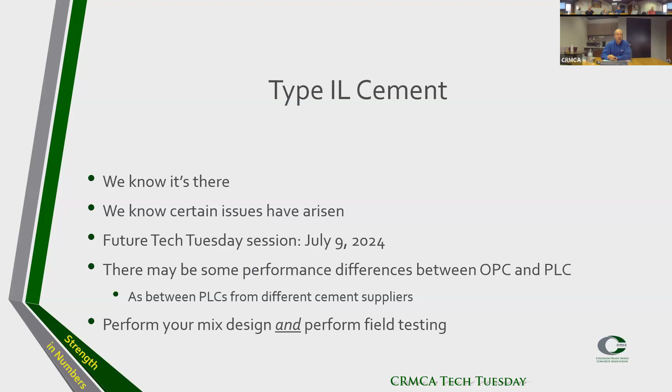So again, with IL, there might be a little bit more sensitivity, but the topic today is really about general hot weather concreting.

Impacts of hot weather on concrete properties. Generally, optimum concrete temperature is around 50-60 F. We all know that more realistic temperatures are between 50 and 90 F, sometimes even higher. Hot concrete has adverse effects: heat of hydration accelerates faster, evaporation of water and faster set. So everything goes a little bit quicker if we have hot concrete or if we have hot weather out there.

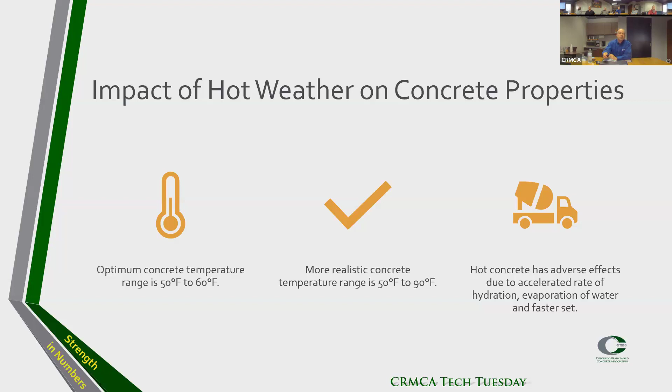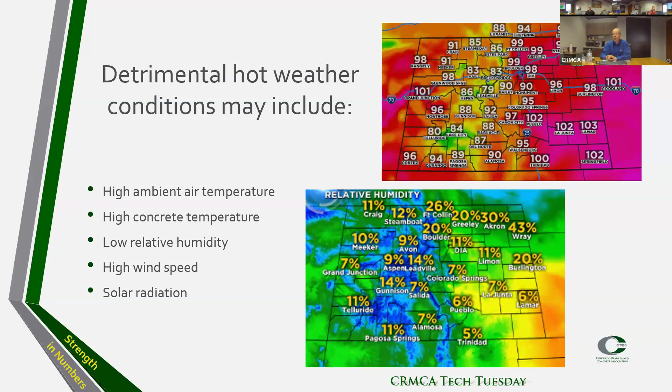Detrimental hot weather conditions may include high air temperature—we all know it can easily hit 100 degrees in the months of July and August—high concrete temperature, low relative humidity. We've seen, or we see quite often, humidity down in the single digits, below 20%, below 10%. High wind speed and solar radiation. So if we talk about hot weather conditions, these are all the conditions that we include for this topic.

Problems that may be created by hot weather or hot concrete include increased water demand and accelerated slump loss. You batch at the plant, drive out 45 to 60 minutes, and you might have quite some slump loss, especially at hot temperatures. It's more difficult to control the air in hot concrete, and set times are much faster.

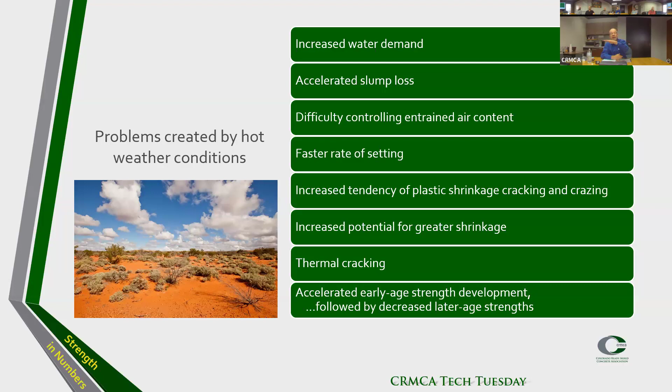Plastic shrinkage, cracking, and crazing are increased generally if you have hot weather conditions. You have more potential for shrinkage, and thermal cracking might be an issue. What we see quite often is that you have pretty good early strength in the concrete, but later the 28 day strength doesn't make it that high. So it accelerates in the beginning, but tapers off really fast if you have hot weather, hot concrete.

Let's talk about workability and slump loss. Slump loss is often compensated with water addition, resulting in lower strength. Here's an example, let's go through this chart. What we see up there is if we take a temperature of around 50 Fahrenheit, we go down the graph and we see that we need, in this example, around 270 pounds of water per yard of concrete.

If we go from 50 to 100 degrees, given this is an extreme example, we now need an additional 33 pounds of water. That's about 4 gallons per yard additional to maintain the same slump. So that means per 10 to 15 degree increase, we need about 1 to 2 gallons more of water. If we actually add water, we're going to reduce the strength quite a bit.

The general rule of thumb is for every gallon of water added per yard, you're going to lose 200 to 300 psi. In this extreme example, we would lose about 20%, or roughly 1,000 psi, at 28 days for that concrete. So the recommendation, easier said than done especially at the construction site, is to add a hydration stabilizer or water reducer, don't add water. The water will always reduce your strength.

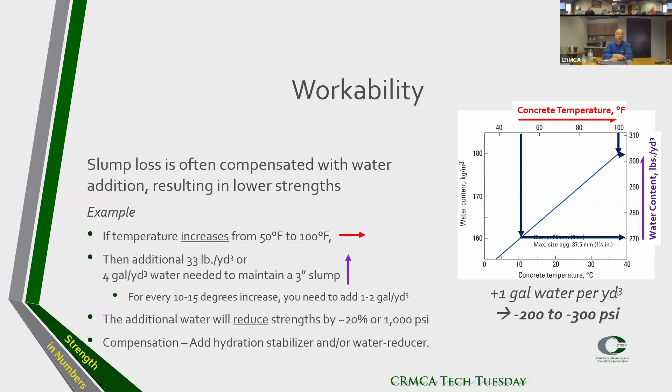Here's a picture about calorimetry. In the cement concrete lab, we can analyze the heat that is generated from the hydration process. In the upper curve we see the cumulative heat generated over about 70 hours, so over 3 days. You see the heat generated at 57, 68, and 90 degrees - these were just the temperatures we had in our lab, couldn't get any lower. But you see there's quite a bit less heat generated at 57 compared to 90 Fahrenheit.

The heat of hydration from the calorimetry directly correlates with the strength development of cement. In the lower graph, the power curve, it just shows a differential that displays the highest heat generation - in this case around 7 hours for the 90 degree concrete, and about 14 hours for the 57 Fahrenheit concrete. So again, the heat of hydration directly correlates with strength development, and for us it's a nice measure to see how a cement reacts at different temperatures. We can also use this with admixtures to see admixture compatibility with different concretes.

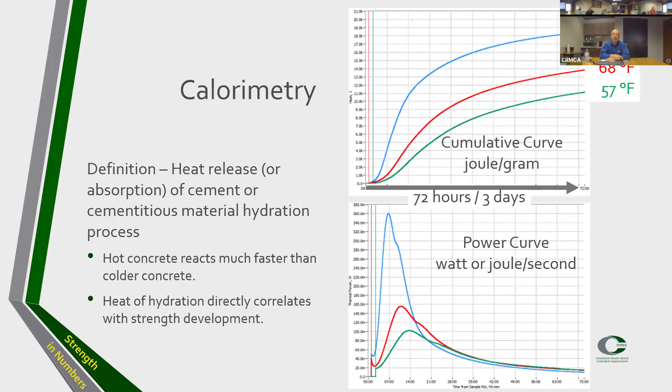Water content versus shrinkage: in this case we see at the top, from 210 to 460 pounds per yard of water, how the drying shrinkage increases. This is a pretty old graph also from the PCA booklet, where a large number of different mixtures and proportions were tested to show the shrinkage of the concrete. What we see in the end is that the more water we have in our concrete, the higher the shrinkage. So again, don't add any more water at the construction site if you don't have to - the shrinkage might increase.

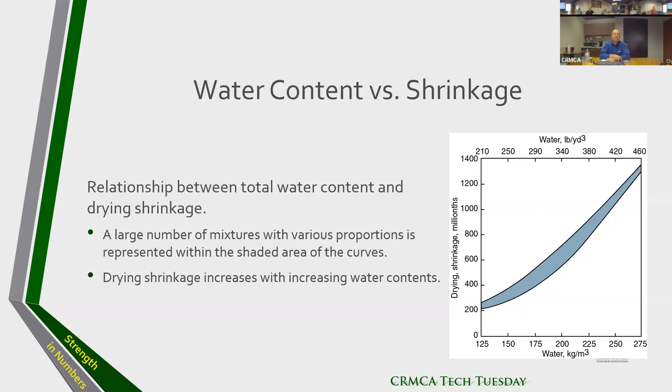So let's say if you have an initial set of 4 hours at 70 degrees, at 90 degrees the initial set will be 2 hours. So you see that window for finishability really shrinks a lot, and that's something we need to consider. If we go from 70 to 50, then very likely the initial set will be around 8 hours.

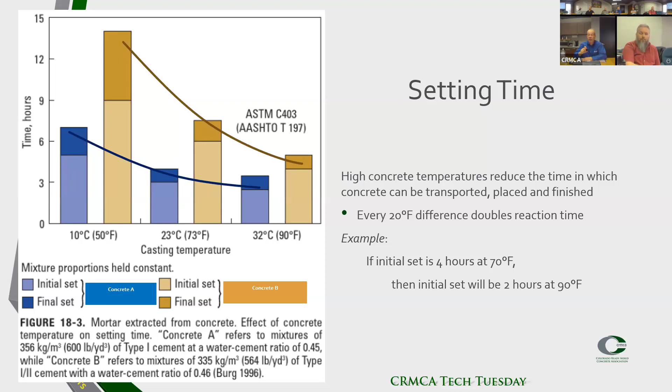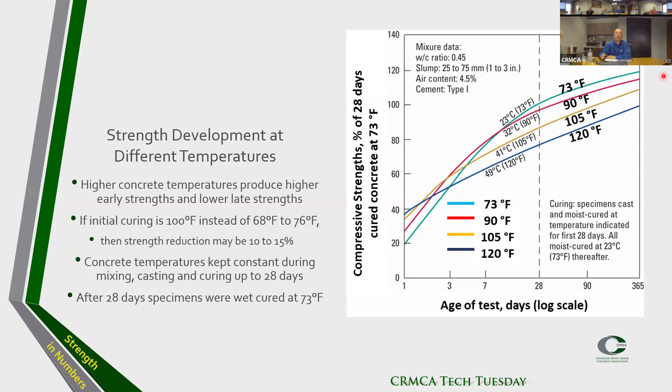This graph shows SCM, supplementary cementitious materials. Upper left is just pure Portland cement. They were cured at 46, 73, and 104. You see that the one at 104 takes off very nicely and then tapers off again. I'm not sure why they put H for hours, but that's like 700 hours, more or less 28-day strength. But you see that the 46 and 73 gain momentum later on and keep on going.

What we see is with slag, F ash, or C ash, they help compensate because they slow down the hydration process in the very beginning, and they do this so that they help mitigate lower strengths later on. So again, SCMs are beneficial if we have higher temperatures in concrete.

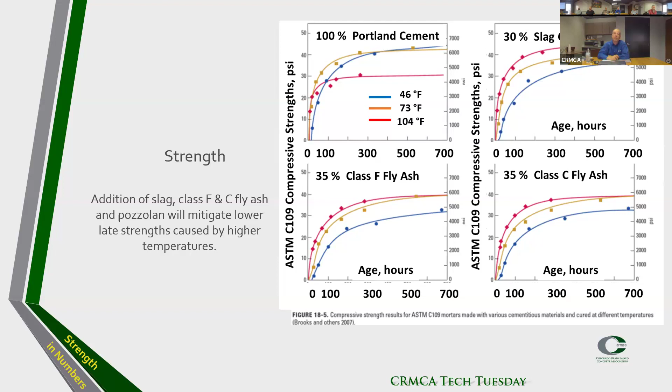Oops, that was one. I clicked on it on my side, sorry.

Plastic shrinkage, cracking, and crazing. Generally, hot weather, hot concrete will increase the tendency for cracks in fresh and hardened concrete. In fresh concrete, it's generally because of the rapid evaporation of water that leads to plastic shrinkage cracking. In hardened concrete, it's drying shrinkage, especially when we have higher water content, and what we showed before, you have higher shrinkage and there are cracks that might develop. So in this case, you see the crazing cracks because of the rapid evaporation, and then a large dry shrinkage crack that formed later on in the concrete.

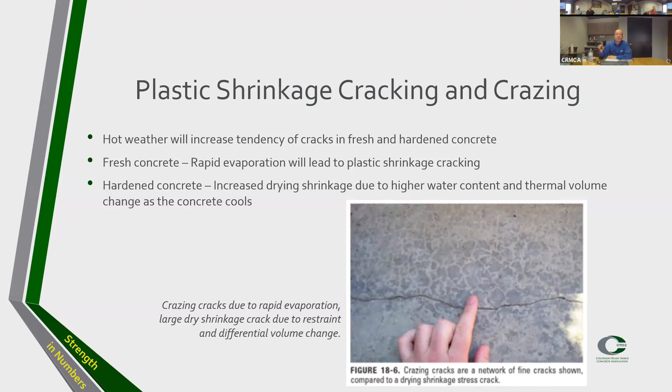Reasons again for this kind of shrinkage, cracking, and crazing: low relative humidity, like we have here in Colorado, increased wind speed in the afternoon, increased concrete temperature. The higher the cementitious material content, the higher the potential for cracking and crazing. Even though we like to sell cement as a cement producer, we still recommend lowering the cement content generally in concrete to reduce the shrinkage cracking.

Lower water cement ratios tend to lead to higher drying shrinkage, cracking, and crazing. Concrete mixtures with low bleed rates, silica fume mixtures, some of the new ternary blends that are coming out, have really low bleed rates, and we have to be very careful about shrinkage cracking. I'll mention that later on when we go through some graphs about when we need to cure and when we may avoid curing.

Generally, one of the things we see is that finishers start finishing too early because the surface is drying out, and they think that the concrete is ready to go on, but it's actually not there yet.

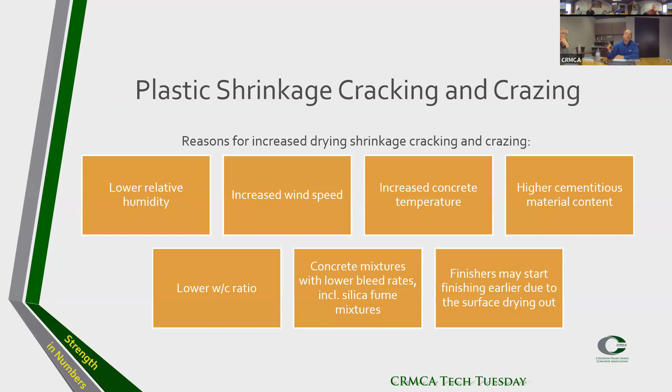Precautionary measures to avoid drying shrinkage cracking and crazing. The next slides show graphs, but if evaporation of bleed water is 0.2 pounds per square foot or more, we should use windscreens and fogging.

If the evaporation of bleed water is 0.05, which is pretty low, or more for silica fume and metakaolin mixtures, then you need to use windscreens and fogging, or use evaporative retarders and curing.

One recommendation from our side is that with blended cements, the 1L and some of the 1Ts, to go actually down to 0.1 or even 0.05 to avoid plastic shrinkage cracking. The 0.2 threshold is really meant for concrete mixtures with normal type 1-2 cement. Again, for 1L and 1Ts, it's better to go for 0.1, or even better, 0.05.

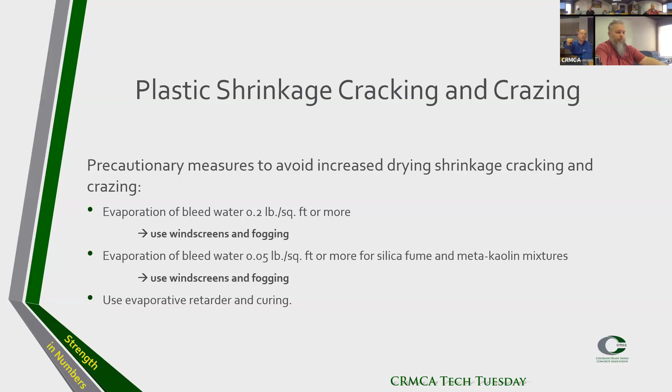It's a little bit more on the contractor side, but that's how we can minimize drying shrinkage cracking and crazing. This should help. Again, here is the graph — I'm going to go through the next slide.

For normal concrete, 0.2 per square foot per hour or higher, we expect issues. If concrete has silica fume or metakaolin, at 0.05 we expect issues. Again, for 1Ls and 1Ts, 0.1, maybe 0.05, would be advisable.

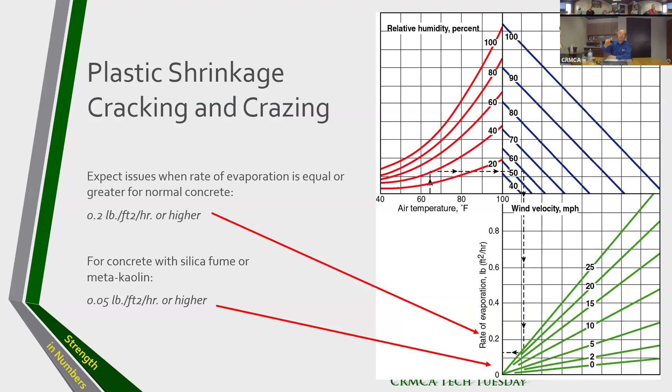Okay, let's go for an example. In the morning, air temperature is 65 degrees, relative humidity is around 40 percent, concrete temperature is 60 degrees, and expected wind velocity is 20. Going back to the graph, you see about 0.13 pounds water per square foot per hour evaporation rate expected.

If you do the same concrete mix but now it's mid-afternoon, you're at 80 degrees air temperature, relative humidity is still the same, but your concrete temperature has increased by 10 degrees since the aggregates got some sunshine, so now it's 70 degrees. Wind has increased a little to 25, and now you're already at 0.2 pounds per square foot per hour.

So that means for an ordinary Portland cement, if it were a 1-2, in the morning you'd still be okay — there's less risk of plastic shrinkage cracking. But in the afternoon, there's for sure a higher risk of plastic shrinkage cracking and crazing. If it were a 1L or 1T, I would already be careful in both cases and start fogging and curing beforehand to avoid plastic shrinkage cracking.

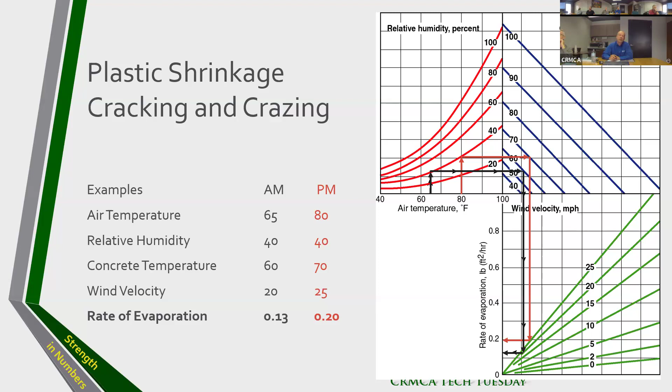Precautions to minimize plastic shrinkage cracking and crazing: fog the slab immediately after placing and before finishing, making sure there's no water accumulation on the surface. Or protect the concrete with temporary coverings, plastic sheeting, or wet burlap. The thing with plastic sheeting might be that you see some streaks.

What we see generally here, especially in Colorado Springs, is that they do a lot of gutters and curbs right now, and they're mostly protected with plastic sheeting.

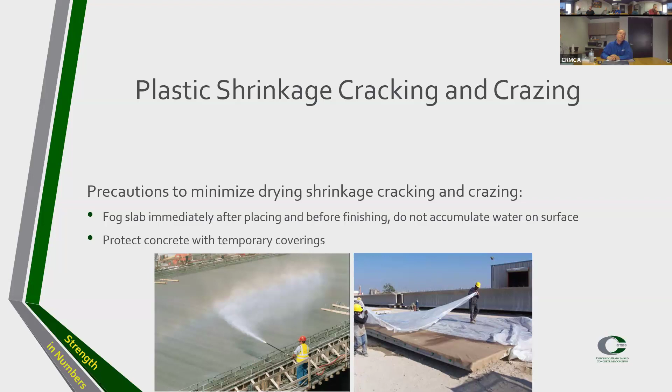Trial mixes — this is directly from ACI 301. If you do a trial mix, the slump should be within 3/4 inch of the max specified. If it's air-entrained concrete, the air should be within 0.5% of the required air content — there's a table in the annex. And the temperature of the freshly mixed concrete should be within 10°F of the intended max temperature as mixed and delivered. So here we already see an issue, because many mix designs are done in winter in a nicely cooled lab, 60 to 70°F.

So you get really good strength — I've seen that several times. Then we have an issue in the heat of summer. In July, temperature is in the 90s, so you're really above the 10 degrees that it was done for the test mixture, and we're going to see lower strength. That's something to consider when we do test mixtures in the lab.

Do you want to click on the annex? Oh, yes. We can go back afterwards.

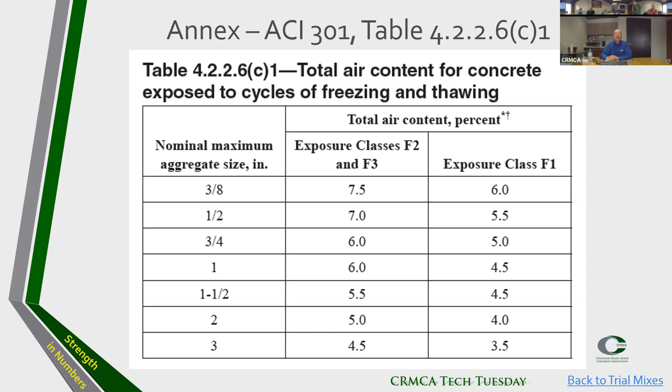This just shows the air content for different classes, F1, F2 and F3, and what the nominal aggregate size is. If you have a nominal aggregate size and the class, your air content should be about there.

SCMs, supplementary cementitious materials, are generally beneficial, as we already saw for strength development. Silica fume and metakaolin do not really impact the temperature of concrete because of their low dosage - they're generally dosed up to 10% of total cement content. But as mentioned before, bleeding rates can be very slow for these mixtures and cause shrinkage, cracking, and crazing.

Aggregates, if they're hot, have a really big effect on the fresh concrete temperature, since they make up about 60-75% of total concrete volume. So aggregates are by far the largest contributor to increased temperatures in the ready mix. That's something we need to consider.

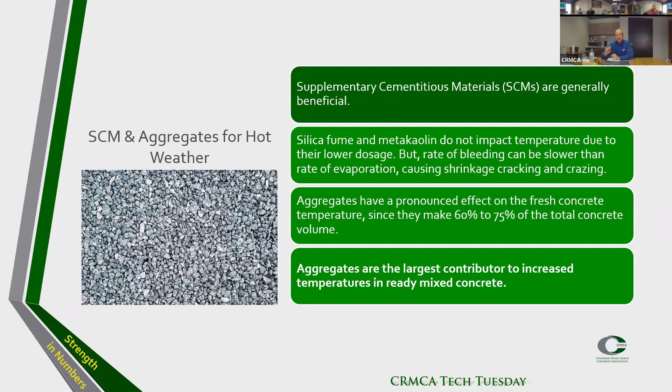Chemical admixtures - something we suggest is to use a hydration stabilizer or extended set admixtures that can be beneficial for hot weather. Water reducing admixtures help reduce the water cement ratio, so you're going to use less cement and reduce the heat of hydration, reducing the total temperature in the concrete.

Also, something we suggest to reduce slump loss is to use a hydration stabilizer retarder just for the duration of the transport. Like if you're here in Springs and you have to go up to Woodland Park, you already know you're going to be 45 minutes on the road - why not add a hydration stabilizer that will stabilize the mix for the next 45, potentially 60 minutes? That's how you can reduce some of the slump loss.

And as mentioned before, air entrainment is increased for hot weather, for hot concrete. So that's something that needs to be considered.

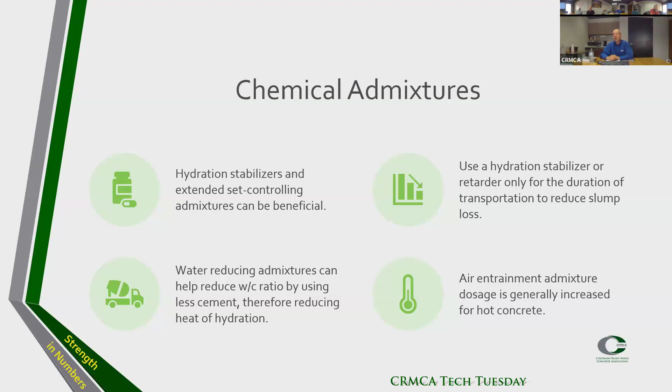Chemical admixtures - evaporation reducers, or retarders, are typically sprayed on the surface right after screeding, bull floating, troweling, or straight edging. One thing that's highly recommended is to really follow the manufacturer's recommendations, waiting for dispersion before the next finishing process.

These evaporation retarders generally contain a lot of water. I just read one, like Confilm - it says add 90% water to the concentrate you get. So that means there's a lot of water getting on your surface, and please do not work that evaporation retardant into the surface, because when you work the water into the surface, you increase the water cement ratio of your surface and weaken it.

Depending on the conditions, you may have to reapply evaporation reducer. Really helpful, but what I heard from several ready mix producers is they are quite often not correctly applied. So it really helps if the ready mix producer knows also how to apply them and make sure it's done correctly at the construction site.

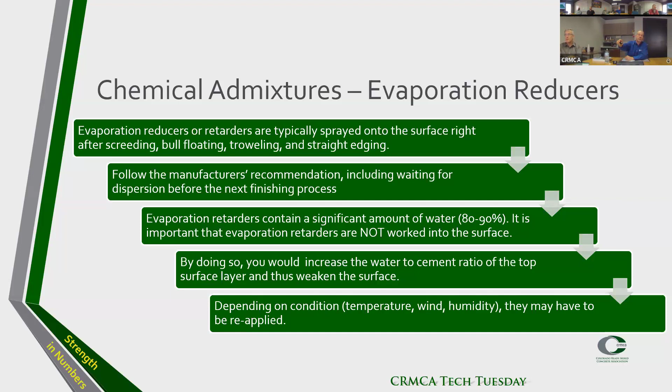Here we have a few applications. Improper use of evaporation reducers - you can see that should be all nice and white on the left side. Completely inappropriate application, not enough - this is a waste of the evaporation reducer. On the right side, a little bit better, not perfect. I think the truck is white because it's white, and the windshield is white because it reflects from the clouds - don't think the truck was sprayed on, but hopefully not.

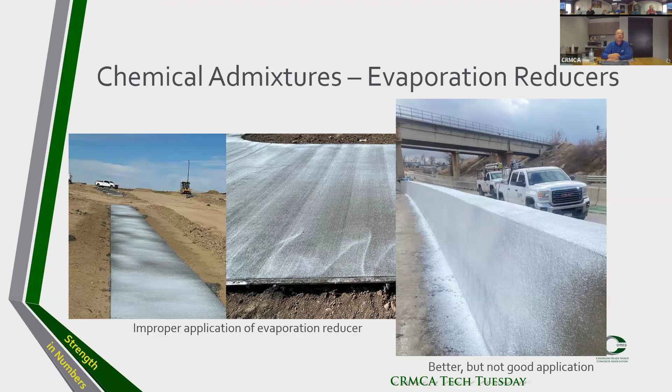I hope not. But again, it looks better, but I think it could be better done. Especially - why do you spray the surrounding old concrete? Just spray the fresh concrete. These are actual pictures here from the Denver area.

Another one - to be fair, I am not too familiar with them, but I picked that up from one of our larger ready-mix suppliers - is they suggest using nano or colloidal silicas that are sprayed onto the surface during floating and troweling, meaning these nanosilicas are worked into the surface. They should not be applied afterwards and allowed to dry out - they need to be worked into the surface. Generally, these silicas help improve the surface hardness because they chemically react with the cement hydration product.

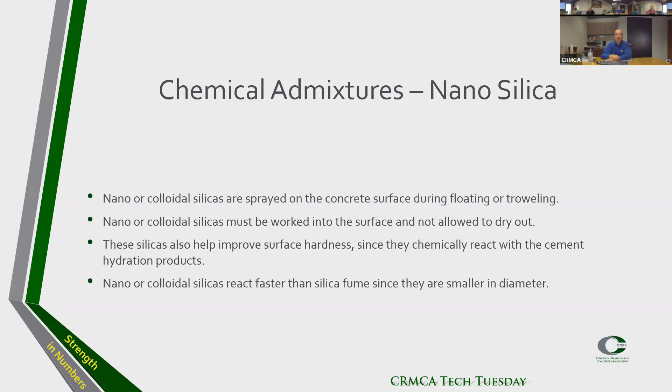So at the very top surface, you get a harder surface. And what I heard is that in warehouse floors or so, this is something that is quite often applied. Generally, nano colloidal silicas react faster than silica fume, and I heard that you should not use silica fume for these applications - it should really be nano or colloidal silicas for surface hardening.

Cooling of concrete materials - we're in the midst of summer, we need to start cooling the concrete. A few examples here: if you want to reduce the concrete temperature by 1 degree Fahrenheit, you can do that by lowering the cement temperature by about 8F, reducing the water temperature by 4 Fahrenheit, or cooling your aggregates by 1.5 to 2F.

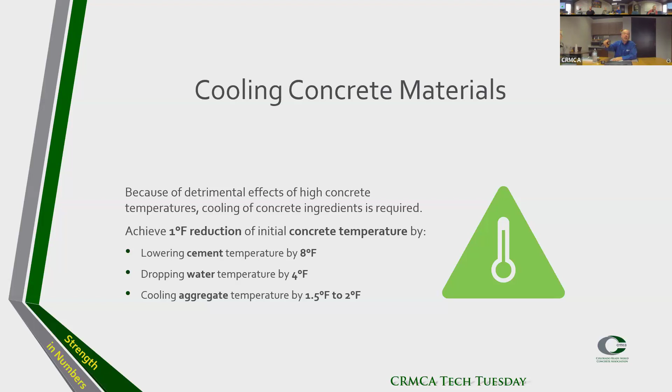Combine, or either or? Either or, yes. The temperature of the cement or the SCMs generally has a minor effect because of its low specific heat and small amount in concrete mixtures. There's no specification for cement temperatures - generally, specifiers and the DOTs limit the concrete temperatures, not the cement, aggregate, or water temperature. They only look at the concrete. And it is difficult - once you have the cement on site, it is difficult to cool it down further.

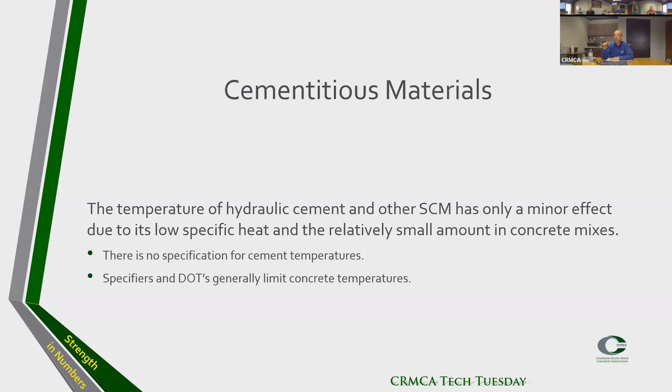Aggregates: cool the aggregates by shading them from the sun, sprinkling them with water. One suggestion is don't have your sprinkler on 24/7 on the aggregates. How about sprinkling them for 15 minutes on, 15 minutes off, or 30 minutes on and off? It's really a trial.

Once you stop sprinkling your aggregate pile, the water starts evaporating from the aggregates. Evaporation is a change from liquid to vapor, and this actually takes more heat out of the pile. It's one of the reasons why a steam burn is much worse than a water burn, because of the heat change from vaporization, the phase change. So just something to consider.

If you need to sprinkle the aggregates, save some water, go to Home Depot or Lowe's, get a timer for your sprinkler, save some water, and likely get better cooling out of your pile.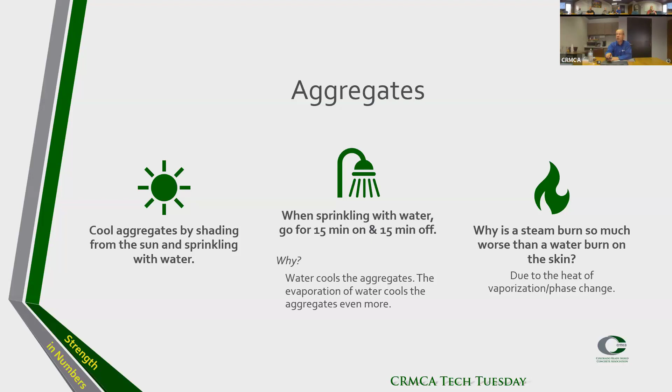Mixing water should be stored in insulated mixing tanks, not exposed to direct sunlight. If they are, at least paint them white. Same for the water pipes: bury the water pipe, insulate them, shade them, or paint them white to keep the water as cool as possible.

Water has a very high heat factor, but because it's a pretty small amount, generally you can only decrease the temperature by about 8 F in the concrete mix.

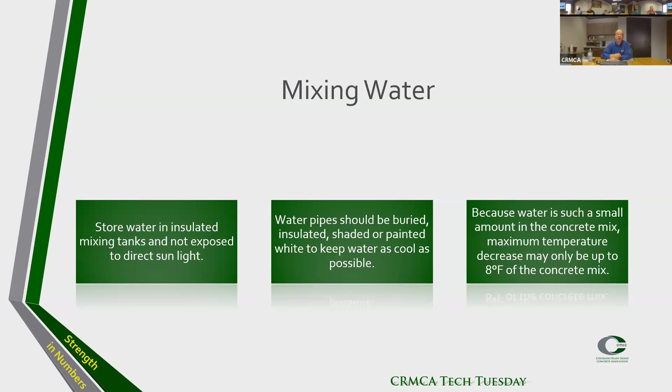Ice is much more effective than water in lowering the temperature. One thing to consider: it must be completely melted once the concrete is discharged from the truck, otherwise you're going to have some pretty large voids in the concrete.

Generally, the crushed ice must be stored so there are no lumps formed. What I've seen before is that you have a big block of ice, and the ice is crushed or shaved right before it gets into the truck.

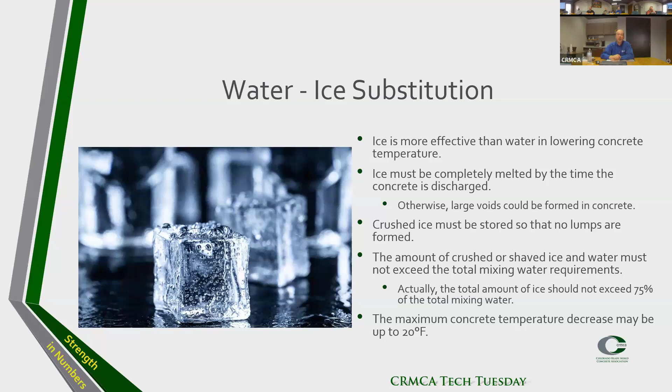Generally, the amount of ice should not exceed more than 75% of the total mixing water, and it's obvious that the ice must be included in the total water content. Generally, you can decrease up to 20 F if you start adding ice to the concrete.

Dry ice, liquid nitrogen, I don't think we use that too often here in Colorado. I've seen liquid nitrogen actually being added to a concrete truck down in Dallas. It's pretty cool, but it's also pretty expensive.

I was going to ask about the expense of liquid nitrogen compared to something else. I don't have the numbers there. I don't know, but I remember down there it was even 95 during the night, so they were actually adding liquid nitrogen to the truck at 5 o'clock in the morning, from the Southern states. Dry ice is CO2, yes.

This should have an impact, no? The dry ice in this case is mainly just to cool down. They're just directly injected in the central mixer. They can also be used to cool down the aggregates.

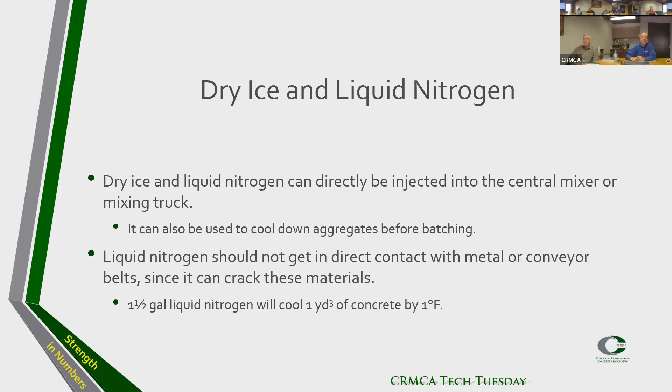One thing, if anybody ever wants to play with liquid nitrogen: it's dangerous to people, it's going to freeze really fast, and it cracks belts if it gets in direct contact with conveyor belts or metals, because the temperature is around minus 180 C. Not sure how much that is in F, but it's really low temperature, so you have to be really careful, and again, it's very expensive to use.

Calculation for cooling concrete materials. This is the calculation that's here out of the booklet, I'm not going to go into it. This is really up to the ready mix producer to do some of the calculations.

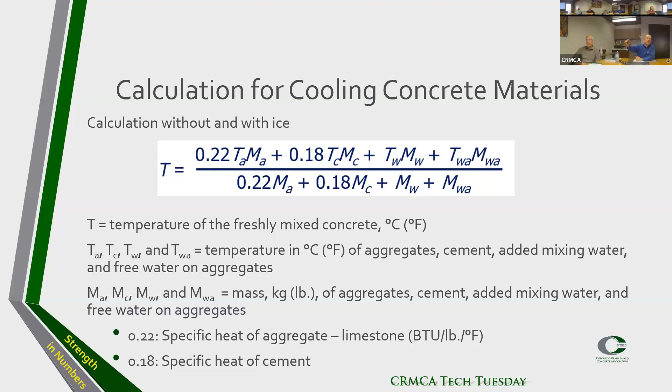I just have an example here, cooled with water versus cooled with ice. So if you have a mix where cement is at 150, coarse and fine aggregate at 90 degrees, in July, and water is 250 pounds at 75, if we just mix that together based on the calculation we saw before, the concrete temperature is going to end up around 93 F.

That's too high. If we can reduce the water temperature from 75 to 40, we can lower the concrete temperature to about 85.

If we now replace 125 pounds of the water, about 50% replacement, with ice at 32, the concrete temperature can go down all the way to 68 Fahrenheit. So it's quite a big change, you see, you can go from 93 to 68.

It is with some work, especially with the ice. Again, the ice must be shaved or crushed right before it goes into the truck. No lumps of ice should ever go into a truck.

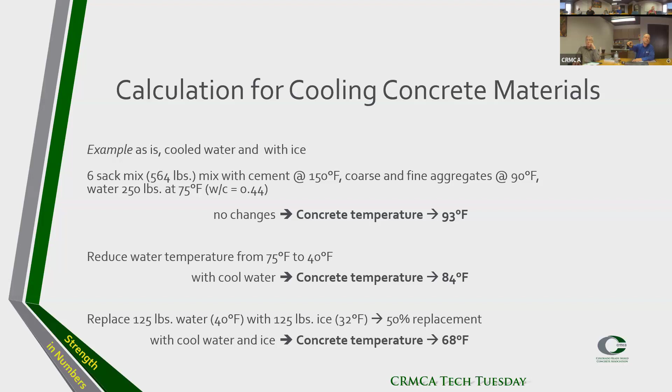This is also from the PCA book. This shows, this is more for mass concrete.

Generally, the rule of thumb is that the temperature inside the concrete compared to the surface should not differ more than 20 centigrade or 36 F.

So in this example, we see by the heat of hydration how the temperature of the concrete goes up, and then it starts coming down after 2 to 3 days. That's the inside. The blue line shows the surface temperature, a little bit lower. But if we remove the form, or almost the insulation, after 3 days, that temperature starts dropping faster than it's supposed to, and there's the potential that we get above the 36 F difference, and there we might have surface cracking.

So it is really wise to keep the form in place so that the temperature remains higher, and that gradient, that difference in temperature, does not exceed 36 F. That's just something to consider.

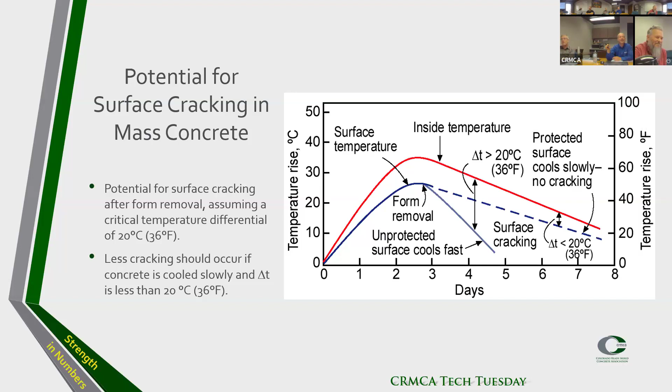Preparation before concrete in hot weather. There are some ACI guides. 305, guide to hot weather concreting, recommends advanced planning when temperatures are between 75 and 100. 305.1 and 301 require that concrete as delivered does not exceed 95 unless it's differently specified.

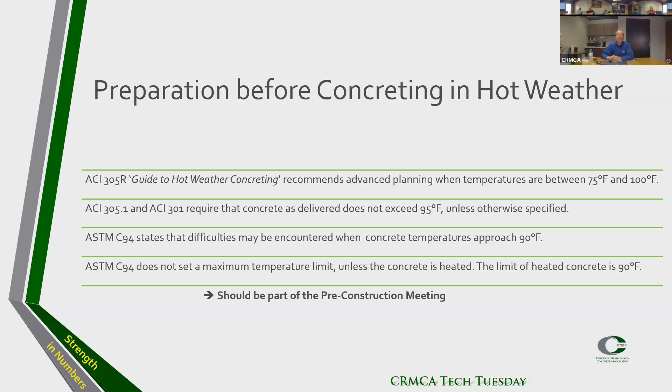ASTM C94 states that difficulties may be encountered when you go above 90. And ASTM C94 does not set a max temperature unless the concrete is heated. So if the concrete is heated, it may not exceed 90 F. This should be part of a pre-construction meeting, really important, especially in summer, to make sure that the concrete that is delivered does not exceed the specified max temperature.

This is from CDOT, directly from their website. The web link is underneath. It says hot weather limitations. Just going to read it: placing of concrete during hot weather shall be limited by the temperature of the concrete at the time of placing. Mixed concrete that has a temperature of 90 or higher shall not be placed.

Contractor shall provide fogging equipment and keep the concrete surface moist at all times, fogging with an approved atomizing nozzle until the curing material is in place. And the aggregate stockpile shall be kept moist at all times. So again, that's directly taken from the CDOT spec. You can look it up, 601.12 (b) on page 19. CDOT limits temperature to 90 degrees at all times.

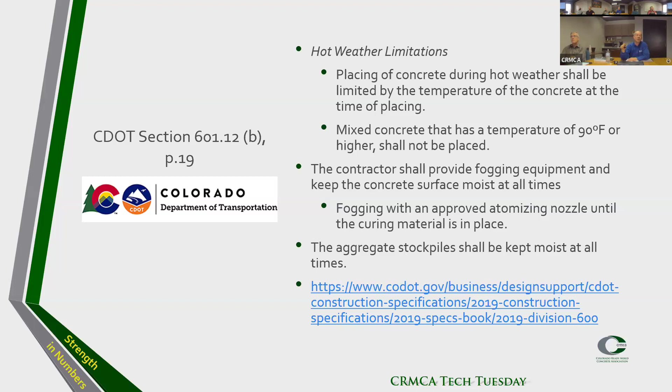That's about it from my part. Well, are there any questions from the chat? There's no questions on the chat, and I just removed the restriction to unmute yourselves. So if you have questions through Zoom, please don't hesitate to unmute and ask the question. It sounds like we've got a question here in the room as well, though.

Yes, of course. Everything you presented shows that you lower the temperature to, let's say, 70 degree F. But how do you keep that? Because it seems to imply that temperature can be kept quite long at a low level.

You mean the ambient temperature? Yeah, I mean, you do all these things to lower the temperature, and then you have a graph showing that at the lower temperature, the strength will keep improving. But this temperature cannot be kept low all the time.